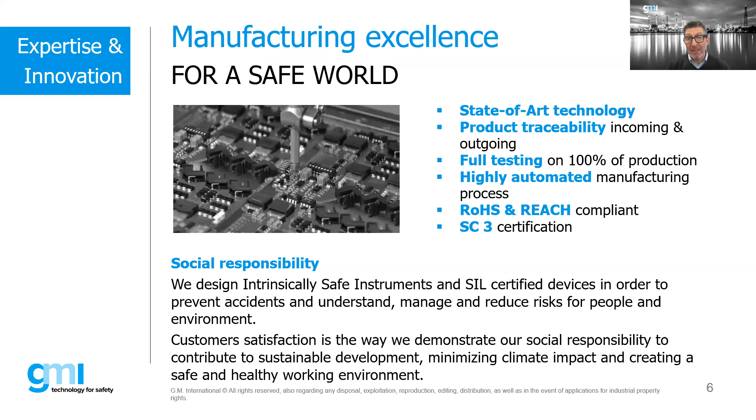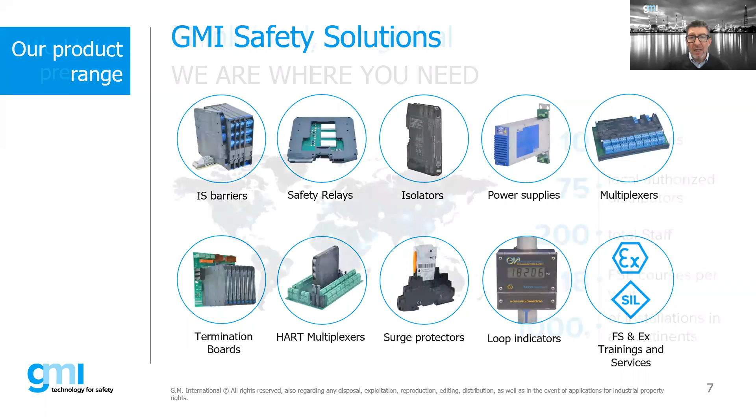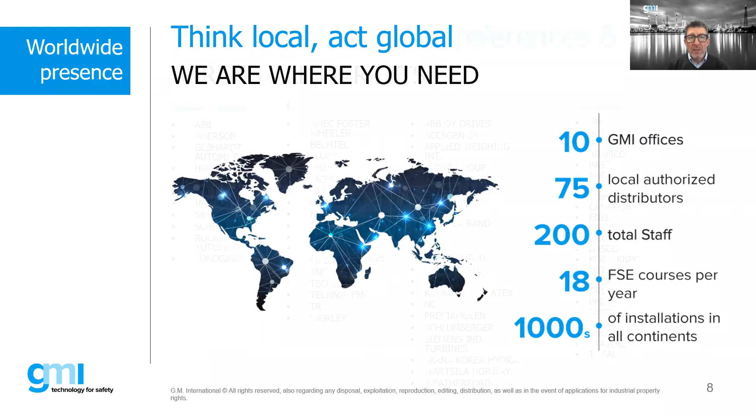And when we really start looking down deep and start seeing some of these issues, we actually can find that in many cases, it starts at the very early stage. Now, this particular report, which was interesting, came out quite a few years ago. It didn't deal specifically with EX mistakes, but it talked about some of the biggest areas of concern and root causes for industrial accidents.

And if we see in this slice of the pie - and again, I'm an engineer, so I think if it can't be the engineers, it's got to be those idiots out in the field doing problems. But if we actually notice here, a lot of the problems actually result at the very early stages in specifications.

So what this presentation will do is actually talk about the various mistakes at the various stages, because what I typically find in many cases is that when I go in and do a final inspection, maybe equipment is installed properly, it's absolutely done perfectly. However, it wasn't the right equipment in the first place due to various issues.

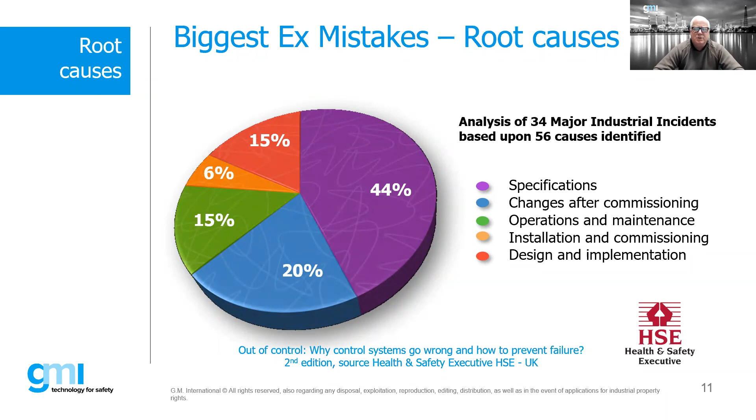So there's never really a time that people set out to say, hey, I'm going to create some mistakes today that will result in a disastrous situation 3 years from now or something like that. We don't deliberately try to make these mistakes, but it is something we have to take note of as engineers and designers - that in many cases, these mistakes that ultimately result in major issues can come at those very, very early stages. So that's really the intent of trying to cover some of this information today.

There's EN versions of it, there's different country versions of it, but the base standard is that IEC 60079-17. The installation standards are all over the place, but the main IEC one is the 60079-14. So the intent is that when we're designing systems, we use the -14 standard as well as country-specific wiring regulations, as well as client-specific wiring regulations. And then we follow up with that with our inspections based upon the -17 standards.

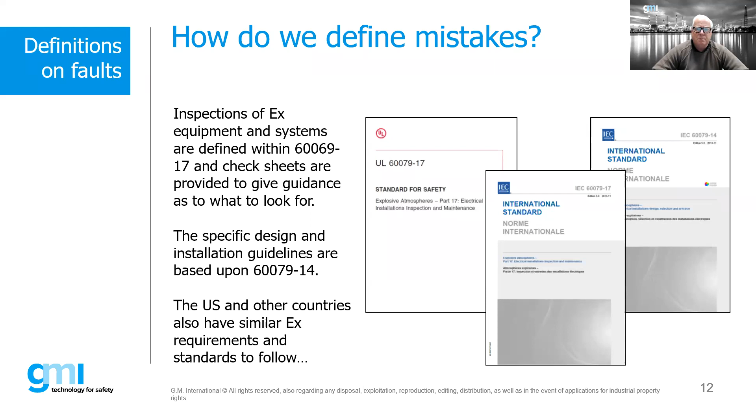So if you have not seen the -17 standard, at the very back of it they have inspection schedules. And this is what, as an inspector, I use when I'm doing a detailed inspection. And we have different grades of inspection - detailed, close, and visual. And there are inspection checks that we use to go through the equipment that's installed.

I always tell designers, hey, look at these inspection sheets before you call an inspector in, or actually, ideally, make sure that you're following these as your check sheets for even writing your specifications, because these check sheets are basically the information that people such as myself, when we come in, are going to be using to make sure that we catch those mistakes, those errors that are made. So it's important that we use this, we're aware of this.

And again, it's a handy tool. It's available. Use it even as a designer, because this is going to help make sure that once that product is ready to leave, that it's safe. And not only that, but the users where we're installing and maintaining this equipment, we want to use this as well.

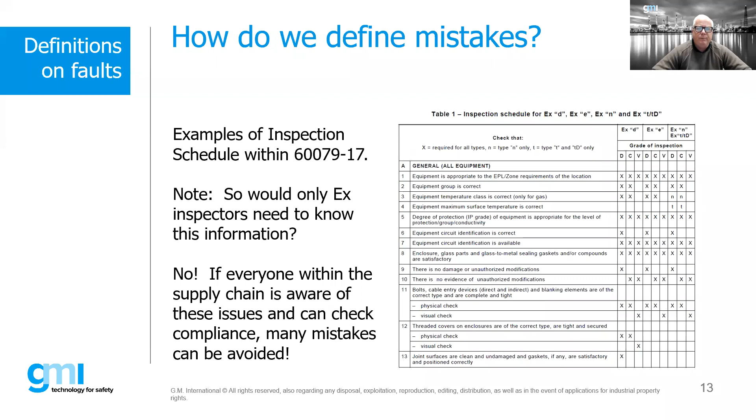So one of the biggest mistakes that I see really comes from one side of the business - as Paulo mentioned, we do training, we do inspections, we also are a supplier. We're a supplier for GMI products, but we also supply other EX equipment as well. And as a supplier, we get calls and inquiries from various people all the time asking for EX equipment, which is great - that's a big portion of our business.

And one of the biggest mistakes that I always see is that I'll get an inquiry and somebody will say, I need a motor starter and it has to have this, and it needs to be suitable for zone 1, and that's about the extent of it. Now, that doesn't mean that inquiry was not good, but that's really not telling me all the information I need in order to generate a quotation, right? Zone 1, okay - is it ATEX? Is it IECEx?

What is the standard? What do I need to comply with? Things like gas groups - is it 2A, 2B, 2C? What's my T code? Obviously EPL or zone of suitability is the big one, and that's usually the one everybody gets. But other than that, sometimes we don't get all that information.

Another one that gets overlooked is the ambient temperature. If a product isn't marked, it defaults to -20 to +40. However, we notice in many parts of the world, +40 is not going to be sufficient. We have higher ambient, especially in the Middle East or on the Gulf Coast, where we see ambient of +50 or +60. And certainly in cold temperature areas, we can get below -20.

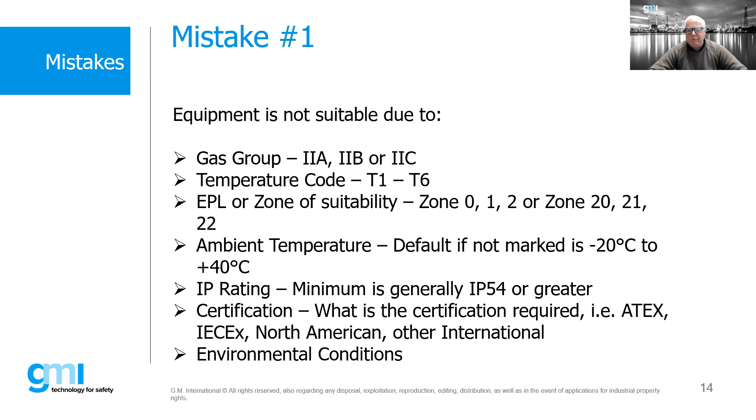So I figured just to give you an example of some things, I put together some labels to give you thought, if you will, to take a look at the label and see what you see on there. Is this product that you see here suitable for my requirement?

My requirement is zone 1, 2C gas groups, must have a T6 or better - T6 is the best. I have a high ambient of +50 degrees C. I need a minimum of IP65 and I need IECEx certification.

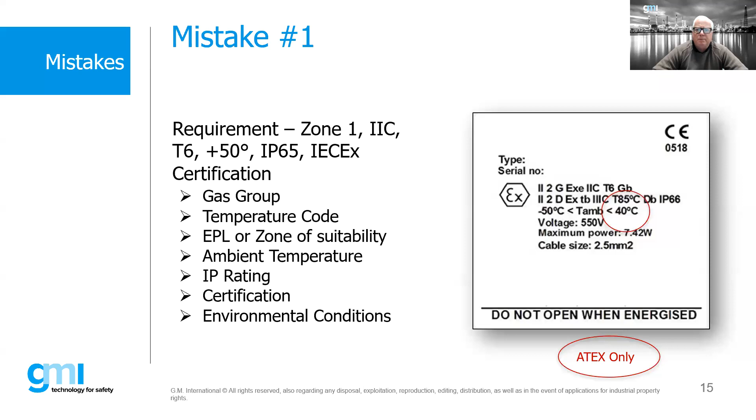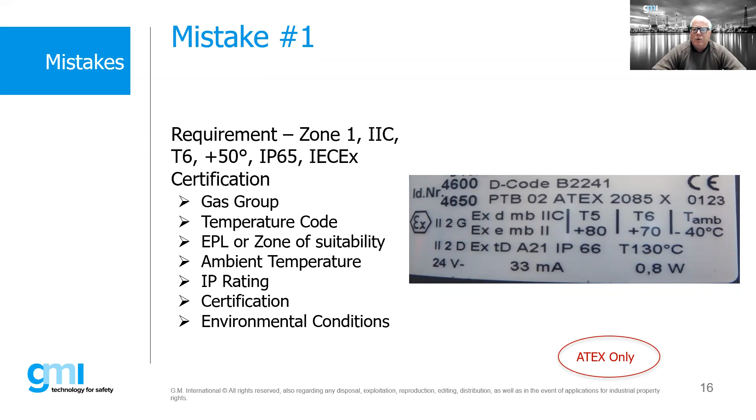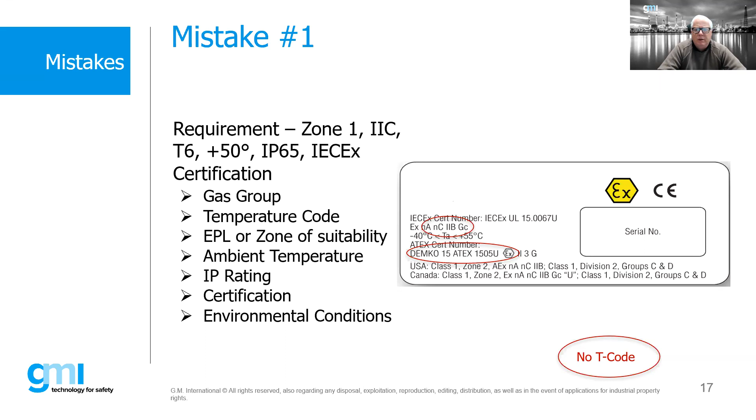Now here's a label for a different piece of equipment. Now we notice on this one, it does say IECEx, and there is a certificate number on there. However, if we look closely at our protection concept, Ex nA and nC are only protection concepts suitable for zone 2 applications. And notice it's 2B and not 2C. We do meet the high ambient requirement, but there's also another thing - there is no T code associated with this because this is a component. And the reason we know it's a component is we see a little U at the end of the certificate, which we'll talk about further in this presentation. So again, another example of a product that we just could not use.

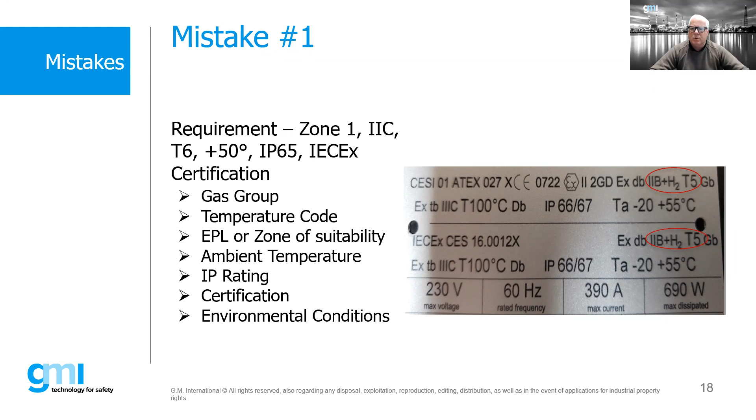Now here's another example. This product, if we look at the label closely, we see ATEX, we see IECEx, but probably some of you have keyed in on this already. We see a couple issues. Number one, we see a 2B plus H2 and a T5. Again, we don't meet the requirements of 2C and we don't meet the requirements of T6. So again, just other examples of labels that we can tell. And this is all part of our inspection process - we go through this, we look at the standard or we look at the certificates, we check the labels, and when we start seeing these issues, this is where we start highlighting them.

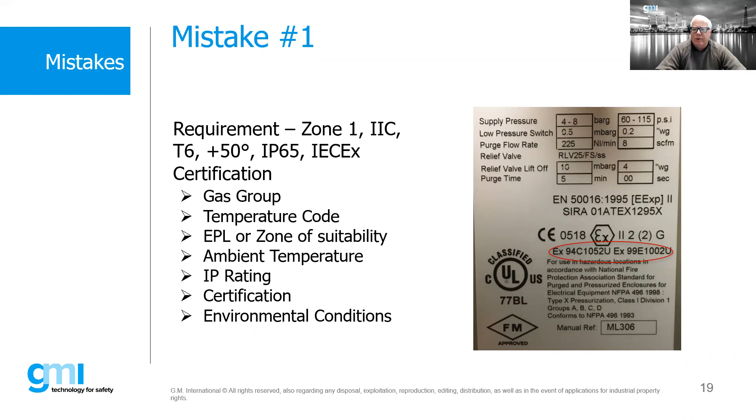Here's another example. Notice that this is an old EN label - the 50016 is from an older standard. However, it does have an ATEX certificate. But there's a couple issues here. Number one, we would want to know, can we install this in a particular hazardous area? We see that we have some brackets associated with this, so it's providing protection downstream. Can we actually install this into that particular environment? We would have to do some further digging on this one, but basically, based upon this information here, as it is, we could not install this without further assessment because it doesn't meet the requirements.

Here's another example, and I promise you we won't go through too many of these, but I just want to give you an example of some of the things that we do see and make it very clear.

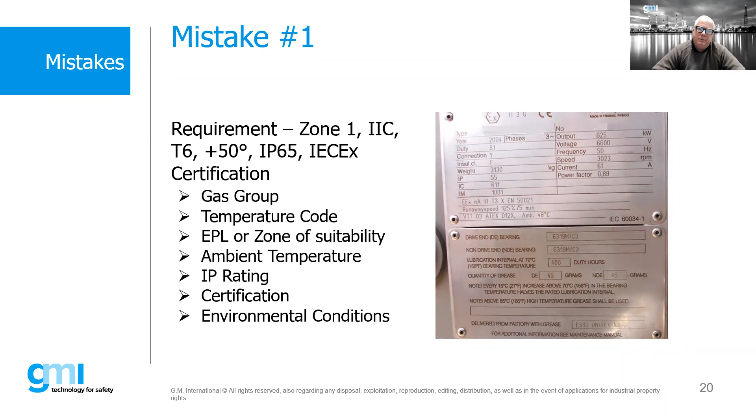Notice in this particular instance, this is certified to an older standard, which doesn't necessarily discount this from being in use. We wouldn't want to install this under the latest standards unless we have new markings on it, because those are old markings. But notice again, NA is a zone 2 protection concept. It does have gas group Roman numeral 2, which is telling us in effect it's good for all gas groups. And notice again, it's ATEX only, and our ambient is only up to plus 48 degrees C as opposed to plus 50. So a couple issues.

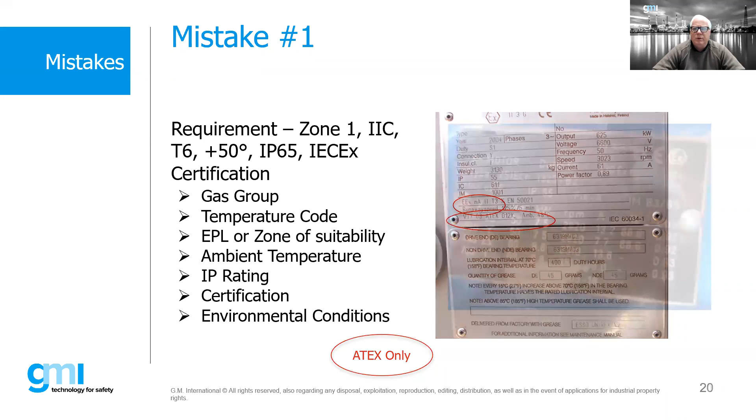Here's another example. Again, it's ATEX only, and I don't actually see a certificate number on this particular piece of equipment, but it is a zone 2 product only. Again, good for gas groups. We don't meet the requirements of IP65, it's only IP55. So again, it takes a little bit of time, we go through this, we identify this.

Now, does this mean that these products are not suitable for hazardous locations? No, it just means that they are improperly applied for this particular application that I've called out.

So the big important takeaway from this is that when we're specifying things, this is where I see the big issue. This mistake is usually a mistake where the engineer, the specifier, writes down the specifications. Then it goes through that supply chain process. It winds up in the hands of possibly a purchasing agent, sends it out to bid. If it's an or-equal type situation...

Well, first off, the design must be such that the engineer is making sure they take into account all of these characteristics, making sure that the original product, if it's a product specification, ensures that it meets that. But then a purchasing person gets their hands on it, says we can buy a similar product for maybe 10, 15, 20% less. It's always important that the engineers, designers, the responsible person is reviewing that information to make sure there aren't those holes. So it's important that everybody within this supply chain, the purchasing people, the engineers, designers, the suppliers, we have to know this information as well.

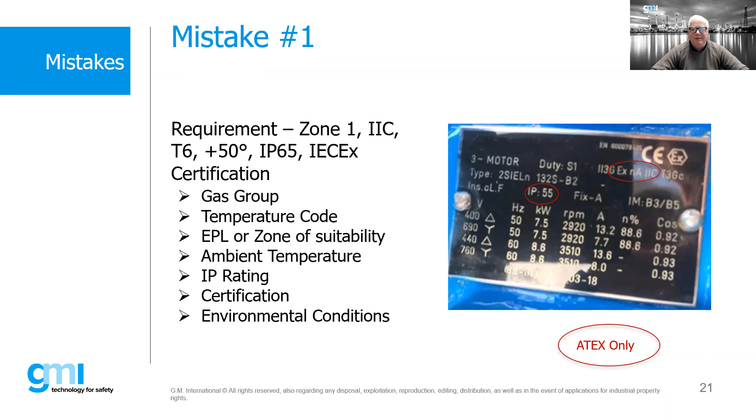So, okay, we have a question here for you guys, making sure you're still with us. Let me launch a question. What is the IEC standard that provides guidance for inspection of EX equipment and installation? There are 4 standards there, the 079-1, 14, 10, or 17.

So please, there is no judging here, just answer, click. We don't see who's clicking what. I had to check my answer myself, so I brought it down here to make sure it's the right one, because I would not know the answer to this one. But Bob gave me a hint. So I think those, Bob, you have A, B, C, and A, so we do have 2 A's here. Yeah, we got 2 A's, 2 A's make it right. But anyhow, you guys know that you either click on 1 or click on 17, and the difference is quite different, but it's a typo there, it's A, B, C, D. Anyhow, okay, give it a couple more minutes. Biggest mistake right here, actually, because we need to move. Yeah, it's your mistake. So before we get this, let me see.

There's a question here: how does the IP rating in this application affect the certification? Well, IP rating, it's always an issue, right? So yes, EX equipment generally has minimum IP ratings required. Most EX equipment requires a minimum of IP54 or greater. However, IS barriers only require IP20. Flame-proof equipment actually does not require an IP rating. But IP ratings are important, they're part of the testing, if you will, for EX equipment. So it is important to have.

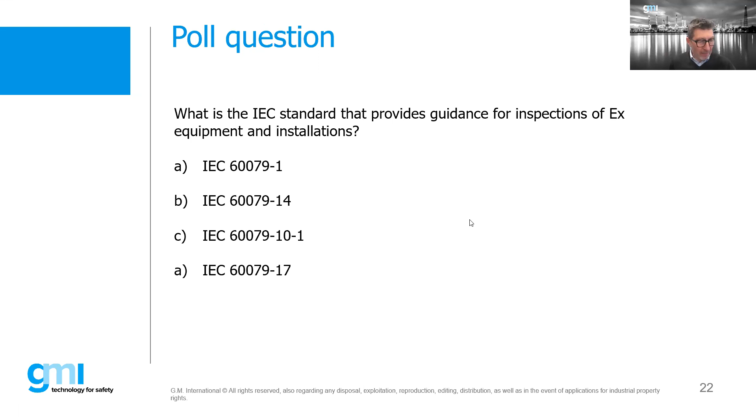Mistake number two: modifications to EX equipment outside of what is allowed. That's a big one. This usually takes place once it reaches a particular point, either as a skid fabricator or out in the field.

Additional entries into EXD enclosures is one of the biggest issues we see. People take EXD boxes and start doing things to them outside the scope of what is actually allowed. So first off, do not drill into an EXD box. You are allowed to do this as the manufacturer or as a manufacturer's authorized repair or modification center.

But once it leaves those locations, don't start drilling and tapping into EXD boxes. The other thing that people sometimes get confused about is adding additional components inside the enclosures outside of what is allowed by the certification. It's really important to understand that adding items inside a flame-proof enclosure changes a couple things. It could affect the temperature code by adding another heat-producing or resistive device inside the flame-proof box.

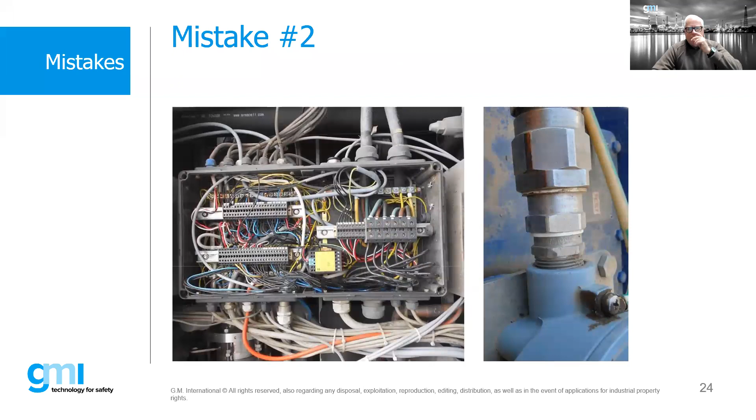So continuing on here - this highlights a little bit with regards to cable glands. In this particular instance, we've taken 2 adapters, if you will, used a cable gland, and put IP washers on. The important thing to note, and this is actually a mistake, is that during installation we can only use 1 accessory with a cable gland, meaning 1 thread adapter. Don't use multiple thread adapters with installations.

The picture on the left shows the tidiness isn't the best, but here's the important thing: we want to make sure we have a drawing of that particular product before we do an inspection, to confirm everything on the drawing is accounted for and nothing additional has been added to that enclosure once installed in the field. If it has, we want to make sure that's noted in our inspection records. We take that information back and make an evaluation of whether adding an additional terminal changed the product - what has that done to its EX certification? Be very, very careful when modifying existing EX equipment.

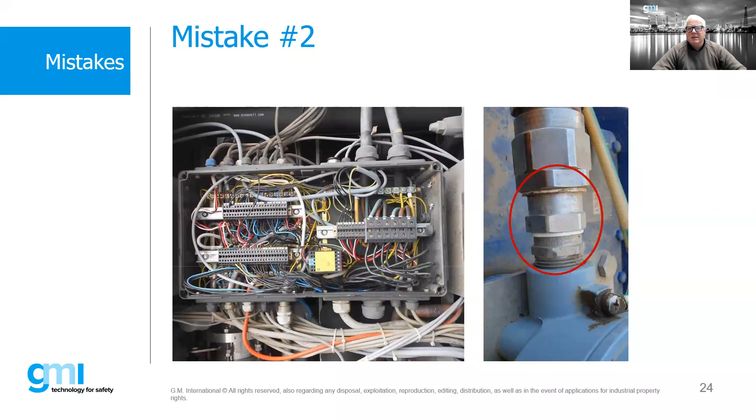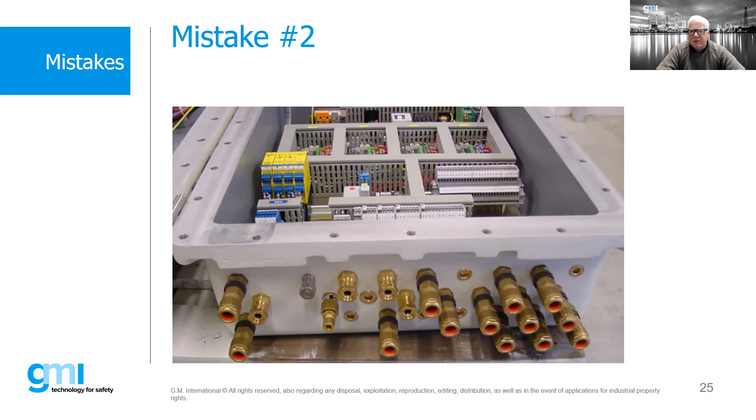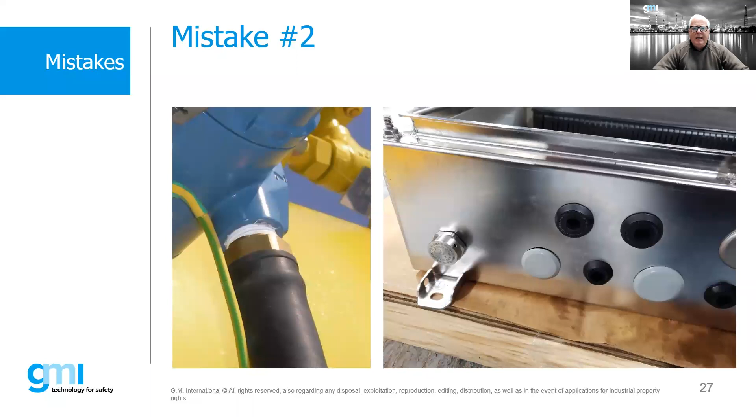This just shows you a little bit more as far as the use of Teflon tape. Here we have on the right-hand side some examples of stopping plugs that were non-certified. Now, these could have been traveling plugs, where somebody installed them with the assumption that cable glands are going to be put into those enclosures. That's fine - however, those would have to be removed before that final detailed inspection and replaced either with a certified plug or a cable gland.

The reason why we don't want to use Teflon tape, as you see on the left-hand side - Teflon tape is fantastic for use on plumbing and gas lines and all that good stuff. The problem with Teflon tape is that the threads between the enclosure and the gland actually act as a flame path. So by putting Teflon tape there, you've basically clogged up that flame path, which could increase the pressure that could be escaping in other flame paths. So we don't want to use Teflon tape - end of story.

What if we put grease on the flanges? Yeah, you want a non-hardening grease. The -14 standard basically says something to the extent of a non-hardening grease. We don't want to use things like silicone, but thread lubricants are perfectly acceptable. Usually the manufacturer will tell you what they would recommend. It is recommended to put some sort of thread lubricant on flanged and threaded designs to keep them from seizing, because that is a major issue.

Yeah, all right, we have still more questions, but let's move forward, otherwise we never reach the end—let's see how we get along. No worries, and by the way, if we go a little bit long that's okay. If anybody wants to stay around, we'll try to accommodate. If you want to stay with us, we are here for you guys.

Yes, so mistake number 3. This gets into cable glands and accessories and the things that we look for: non-certified glands, improper installation. Are we using the appropriate accessories? Maybe using Ex e into Ex d. One of the things that usually everybody understands for the most part, but another issue, is failing to take note of the special conditions for safe use on the installation of cable glands.

Every cable gland that you buy will have an X at the end of it in their certificate, and that means it's a condition for safe use. Generally speaking, it means that it's not meant for portable equipment, meaning it's meant for a fixed installation. However, some cable glands in their X also have additional information, such as: if you're using it with that particular cable, it must be clamped within a certain distance of the end of the gland. So making sure we look at the X condition on the installation of cable glands is important to understand. Because again, as an inspector, I'm going to look at the cert, look at the special conditions for safe use, and see whether or not you're actually in compliance with those conditions.

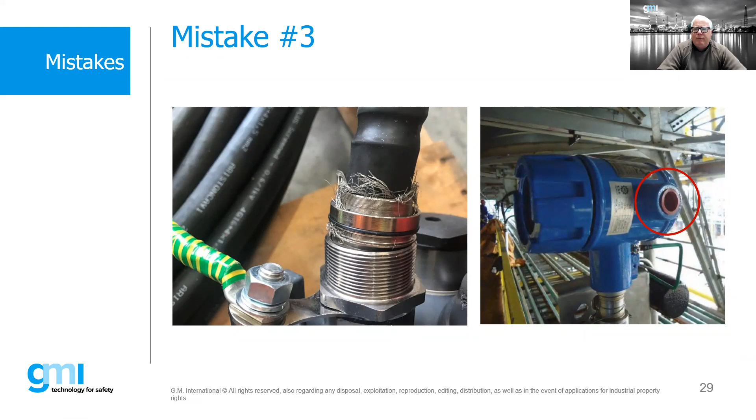This shows a little bit of some of the things you'll see on the left or right-hand side. There's an example of a stopping plug that's actually a traveling plug installed into a transmitter during installation—that should have been replaced with a certified plug. The picture on the left-hand side is a bit different, but what you're seeing there is the armor is not proper, and we also see some deformity in the compression around the gland itself. That's the back end seal, caused by cold flow, which we want to be very, very careful about when installing and maintaining cable glands.

To answer the specific question, can we use a 90-degree fitting with a cable gland if the reducer fitting went into the enclosure and the gland went straight into the 90? Generally, I'd say yes. There's a bit of a gray area in the standards, because it doesn't specifically state the use of a 90, since we're basically saying the gland should go straight into the enclosure. But this type of installation is not uncommon, except we have a little too much there.

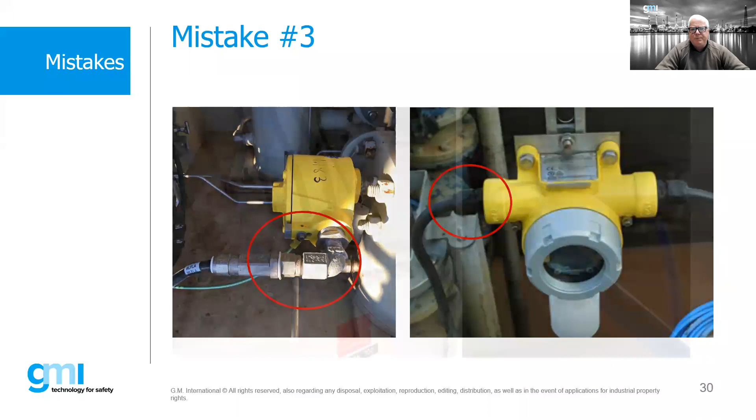These are pretty obvious, but what you see on the left are stopper fittings or seal fittings that we would typically use here in the United States. The person that did this obviously didn't have any understanding of what they were doing, because those all have to be sealed up with a compound-type material. They've probably spent thousands and thousands of dollars on that box, but they've defeated the entire purpose of that enclosure by installing those seal fittings improperly.

And obviously on the right-hand side, you see a cable gland being pulled out and not being properly secured.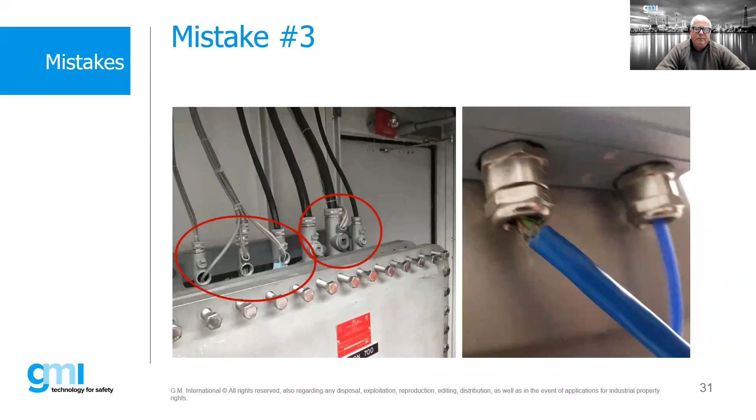These pictures are a little difficult to see, especially the one on the right, but on the left we see what's actually a combination of putty and what looks like a liquid pour-type compound, and they've done it from the inside of the enclosure. So I can promise you those glands will never be removed -- that will be a permanent installation.

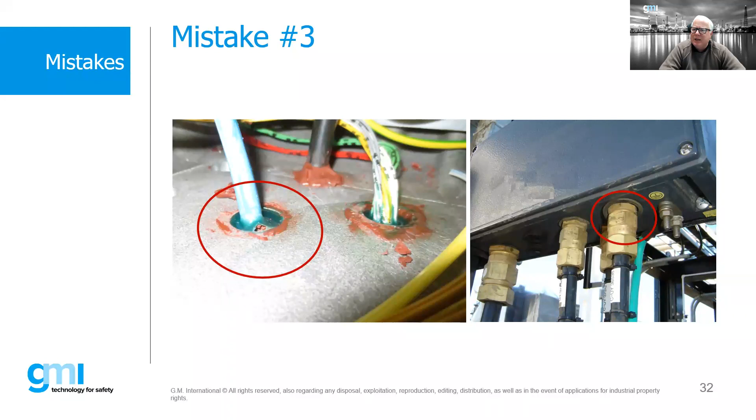That's not good. On the right-hand side, if you look closely, they have an IP washer, but it looks as if the washer is too large and not providing a good IP seal around the gland. Is the IP washer the only means to provide IP protection? That's correct -- it provides the IP protection between the gland and the face of the enclosure. So just glancing at it, you might think it's maintaining the high ingress protection rating, but looking closer, we notice that IP washer looks a little too big. And it is. So it's important.

Can we do something different than an IP washer to provide IP protection, or is that the only means? Some glands have O-rings built into them, and that's certainly acceptable. Generally speaking, otherwise, to maintain the IP rating of the enclosure you're supposed to use an IP washer. There's actually a bit of dispute with regard to the standard -- one of the changes in the '14 standard came for the use of a not-certified washer, but the cable glands now actually have to be certified in conjunction with a particular washer, as opposed to just putting any IP washer on it. The washer itself doesn't have to be certified, but it should be tested and certified in conjunction with the cable gland.

Now, what you see on the left-hand side, we have damage to the cable -- it's being pulled out. In this instance, on the right-hand side, when we start opening up the glands, we notice the armor is not secured to the armor cone. Those are examples where, when installed properly, everything is fine. If you notice in the background behind these glands, those are some cable shrouds.

As an inspector, I don't like these, and most clients are getting away from cable shrouds because what they end up doing is holding a lot of moisture against the cable gland and actually covering up a lot of the faults.

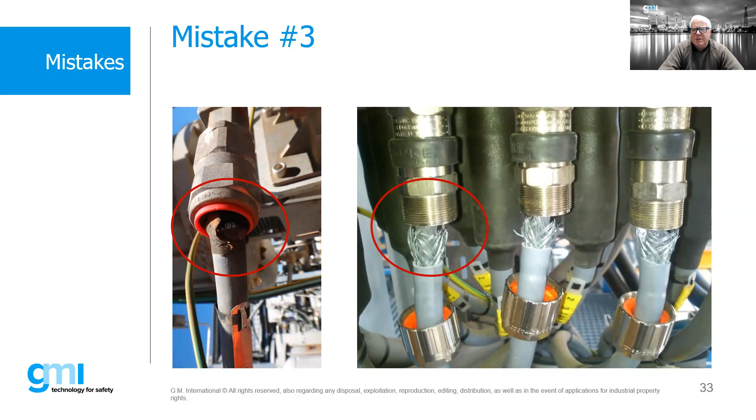This is again the same type of issue. Here the armor is not properly secured on the inside, and we had a cable shroud covering this up. So you have to be very diligent when doing inspections.

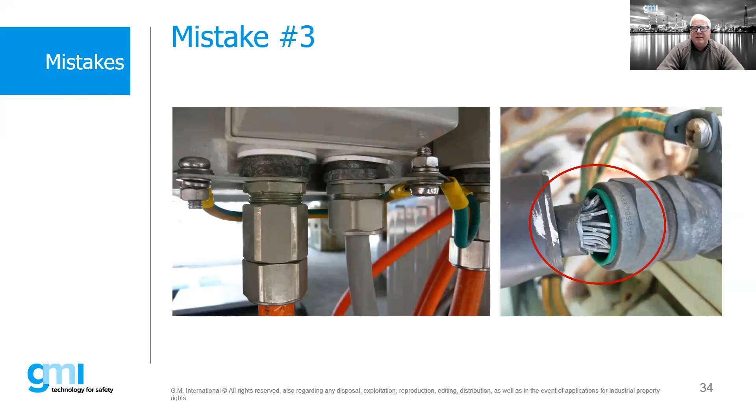On the left-hand side, this may or may not be a fault, but you have an adapter and a gland, which isn't a problem. We have an IP washer against the box, which is fine, that's what we want to see. We have an earth tag, that's fine too. The one on the right-hand side with that IP washer is a little distorted. Is that an automatic fail? I'd say no, but we'd want to reinstall it, and if we can't get that washer to sit flush against the enclosure, then let's replace it.

Bob, there was a question since I noticed this ground plug earlier. If there is a ground plug on the box, it must be connected to ground, right? Is it a recommendation, or is it required?

Yes, there is a requirement within the -14 standards that all EX equipment should be grounded to the grounding point. You'll see, like in the picture on the right-hand side, a ground point on that box, and another box where there's also a ground point. That should be grounded to the structure in some way, shape, or form. So yes, we should be grounding them.

The picture on the left-hand side is a little difficult to see, but in this case we've left the plastic sheathing over the internal bedding, and that's actually a flame-proof gland. So we've compromised the ability of that gland to provide any EXD protection by the use of this plastic sheathing. That has to be removed.

On the right-hand side, obviously they've taken some compound and put it around the back end of the glands for some particular reason. I don't know why.

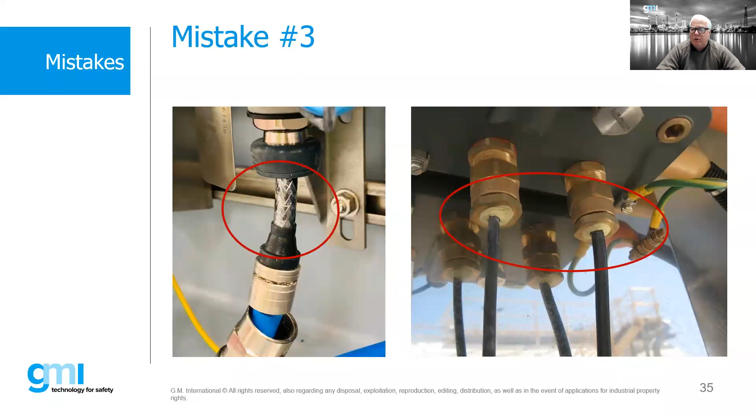When we use barrier glands, on the left-hand side we see that the compound doesn't go completely around all the individual core conductors. That is a mistake. On the right-hand side, there's again a diaphragm seal that's been torn, so that's providing EXD protection that's now been compromised, which would be an issue.

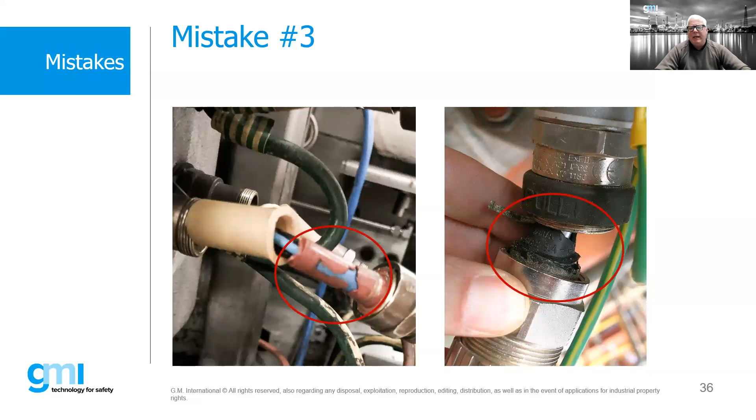As you can see from some of these slides, a lot of the mistakes we see are really around glanding in many cases. It's not completely around glanding, but that is a huge issue. So a lot of times when you start seeing issues with glanding, that leads you to believe there may be some other issues as well.

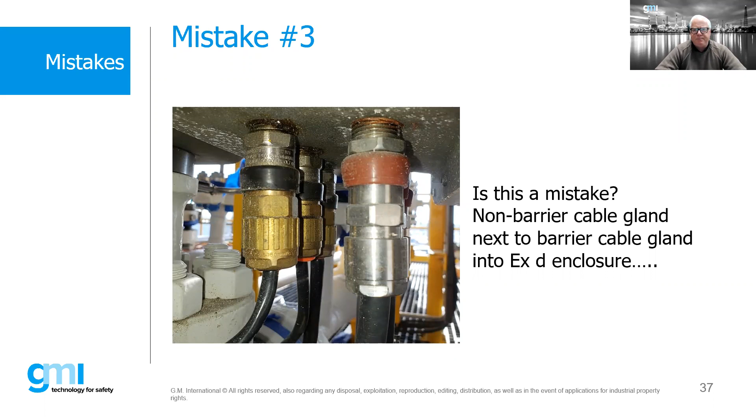Have you ever get afraid when you're inspecting and you see these boxes, and get the feeling you have to run away before something goes boom? Yes, my colleague Wayne has worked offshore many years and was an installer for about 15 years. Then he went through a complex training program to learn all the things he was doing wrong, and he said, oh my God, I can't believe I survived. I don't do as many inspections as Wayne does, but he's shared some stories that are very hair raising. It happens a lot more than we think, unfortunately it's a big issue. We had our own experience too. We went to a plant with my engineer and he said, Paolo, I'm not staying here any longer. I said nothing's gonna happen, but they had an explosion one year earlier and were actually having a commemoration that day. When we talked to those guys, nothing had changed, and we said, wow, are we still sitting here?

So, guys, you had this question - it was easy but not an easy question: Can you use an EX certified stopping plug in conjunction with an EX certified reducer fitting on an EX enclosure?

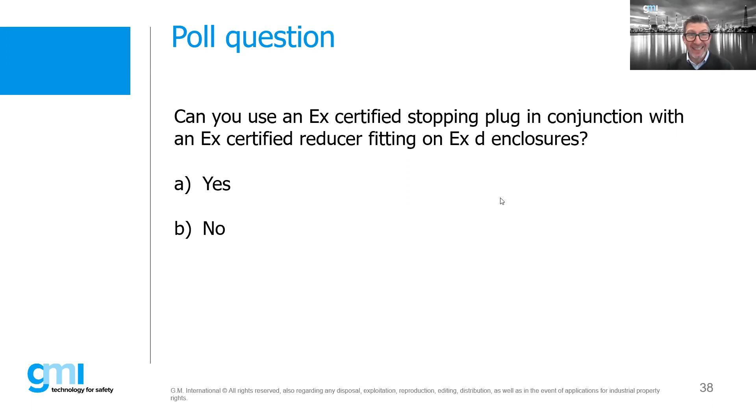Mistake number 4 - we've talked a little about this in other webinars - intrinsic safety has its own faults: no segregation between IS, no labels, improper grounding, no descriptive system documentation, failure to select certified equipment where required, i.e. a non-simple device, modifications to the design after installation such as increasing cable length, substitution of a different barrier type, and so on.

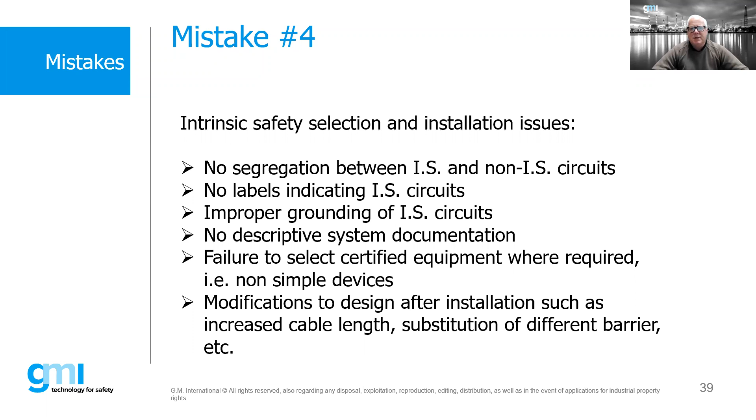These are all faults we see both from the design standpoint and the installation standpoint. On the left-hand side you see a jumbling between IS and non-IS - that's not allowed, we have to have a 50 mm segregation between IS and non-IS. Again, if we didn't open up that enclosure, we would never know this. We would be doing a detailed inspection, and this is where we find it.

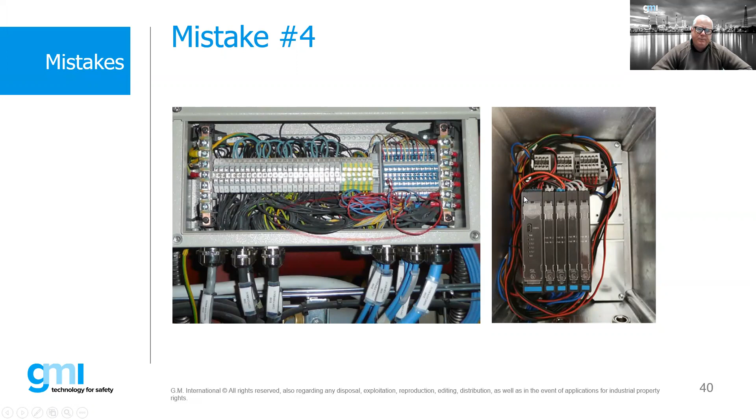On the right-hand side you see again the same type of situation, where we have our IS side and our non-IS side, but we have this looping around which is not allowed. Same type of situation here - on the right-hand side we have some power cable with IS circuits running right next to it. Neither is shielded, so we could potentially induce currents into that IS circuit above and beyond its parameters. Same thing on the left-hand side - we have power cables running right next to IS cables. We don't want to see that.

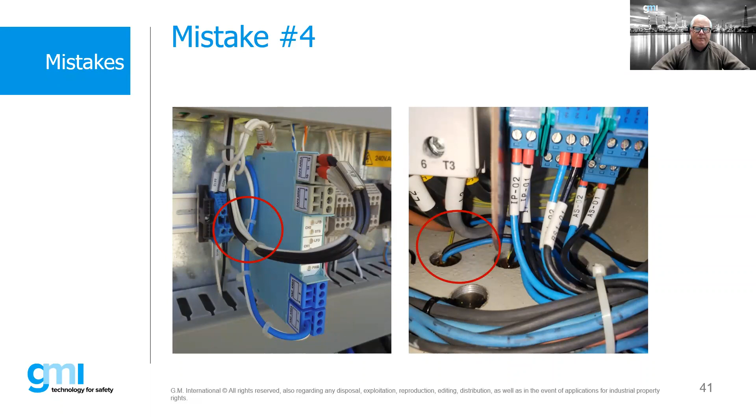Mistake number 5, a very common one: U components versus certified equipment. Notice on the right-hand side - I apologize, it's a little blurry - this is an enclosure full of terminals that was supplied by the manufacturer empty. The fabricator installed certified terminals, did a great installation, but unfortunately the label still shows this was a component. So in this scenario this would not be acceptable because it is a component.

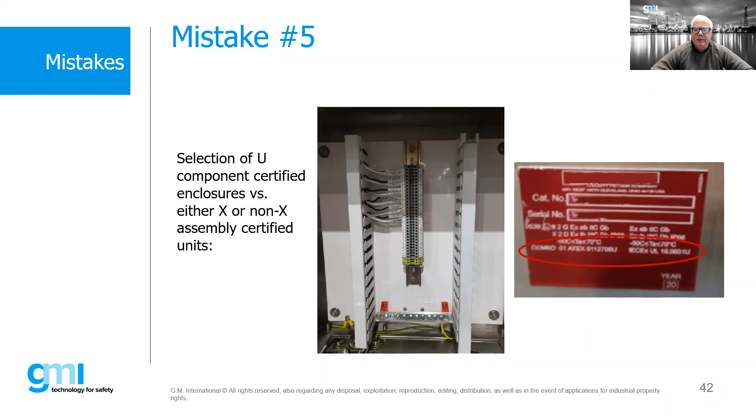This certified product label shows the same product, same part number, SX29.1N. But notice on the left-hand side, the certificate has a U at the end of it, while the certificate on the right-hand side does not. Besides seeing a U or non-U, on the right-hand side we have additional information such as a T code - we notice a T6 - and the number of terminals, the cross-sectional area, the maximum voltage. On the left-hand side we don't have any of that information.

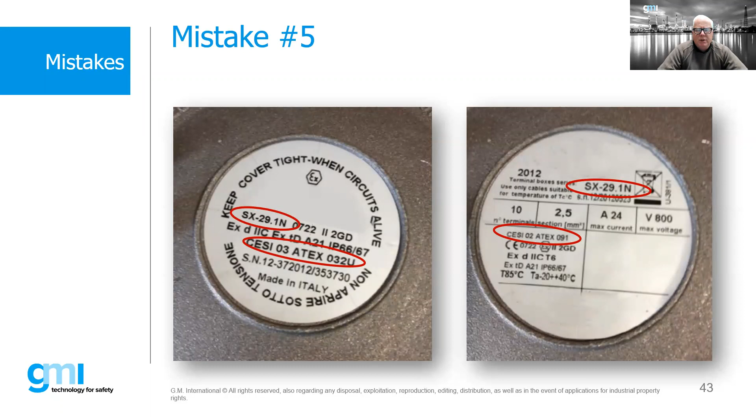So it's important, whether we're specifying, installing, or selecting products, to understand that a lot of manufacturers will sell the exact same product either as an assembly certified with components installed, or as an empty enclosure.

If I'm a manufacturer planning on using this particular enclosure and I'm going to populate it with a bunch of stuff and take that to my certification lab to get certified, no problem, I'll buy the box on the left. If I'm installing this as is, then I want to buy the product on the right-hand side. This jumps up and bites people all the time - use certified versus component certified products. Just be aware of that. If you get a U-certified product, that should be a red flag, unless it's a component on the inside of something else that is fully certified.

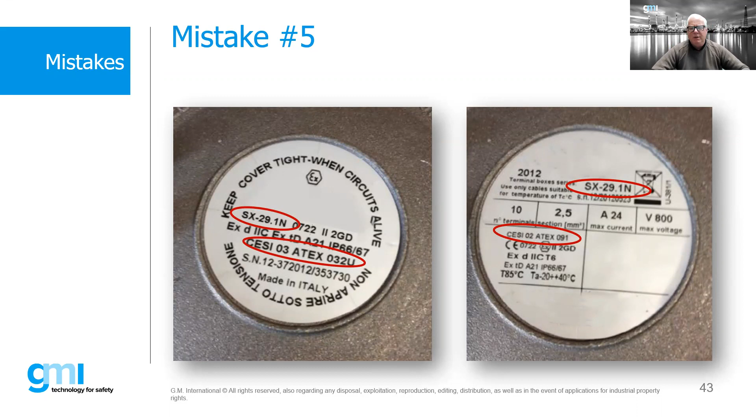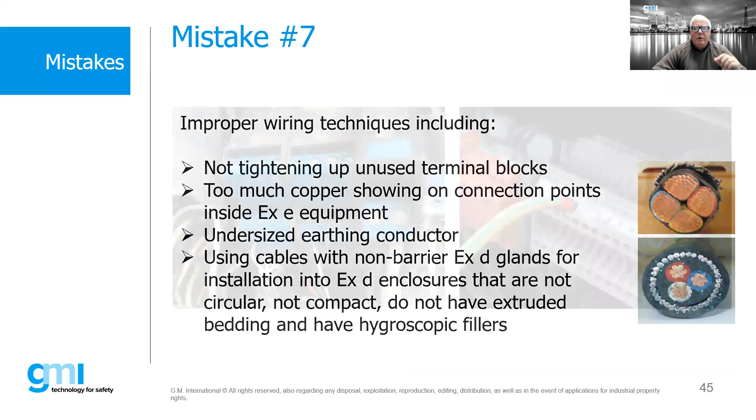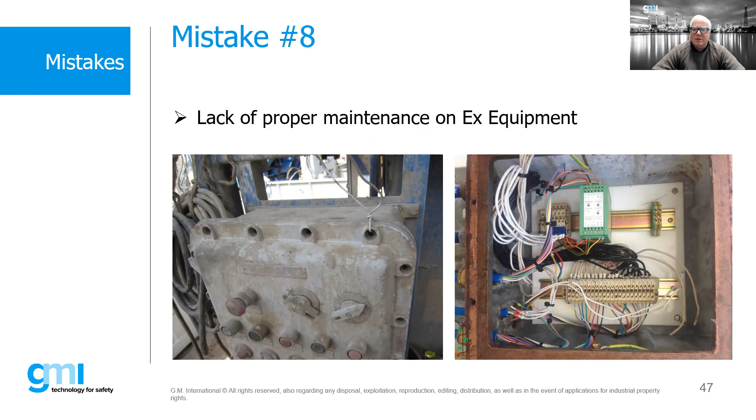Now, I will skip this one since we're running out of time - improper wiring techniques, those types of issues. Maintenance on EX equipment, not using bolts, making sure the flanges are properly taken care of, those types of things. On the left-hand side, accumulation of water and moisture on the inside. And on the right-hand side, when we start adding dust and don't maintain or clean it, what do you think that does to its temperature code? It will make it go up. So we want to keep these installed pieces of equipment relatively clean and dust-free.

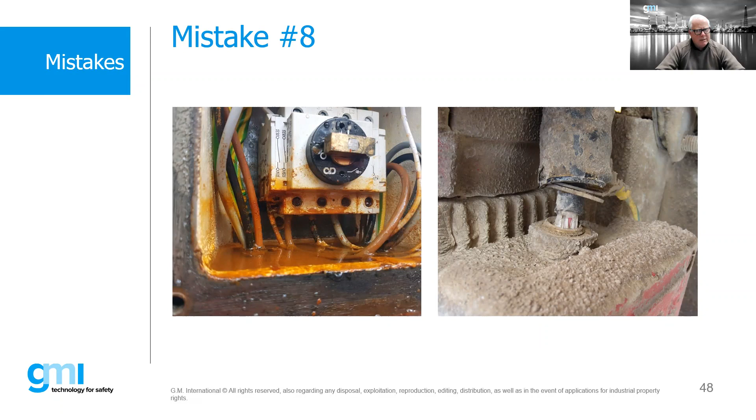Again, earthing of IS barriers - this is a huge issue. We want to make sure that if we have Zener barriers within our facilities, they must be earthed to a clean earth as opposed to a dirty earth, and that resistance has to be less than 1 ohm. So it's important to understand, when using Zener barriers, the difference between clean earth and dirty earth.

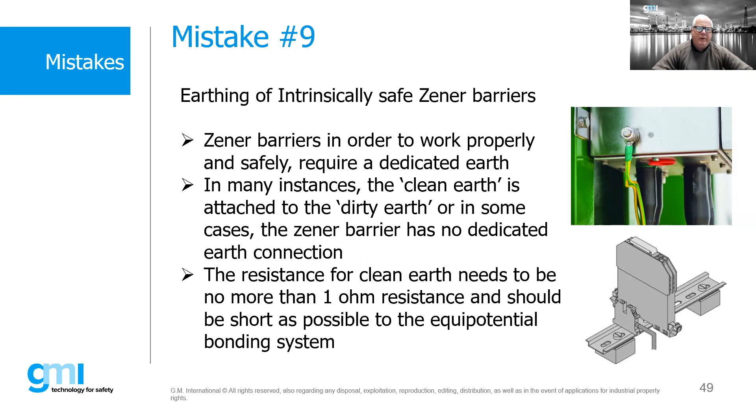Okay, our last poll for today - one letter at the end of the certificate number, ATEX or IECEx, a component certification. You talk about this all the time - it's a component, not a fully certified product. It has to be used within a certified product. We used to have one of those, actually - it was a small power supply we designed, rated correctly, and the customer had to use it within their product and install it, then certify the complete product, like antennas. We were selling it to an antenna manufacturer.

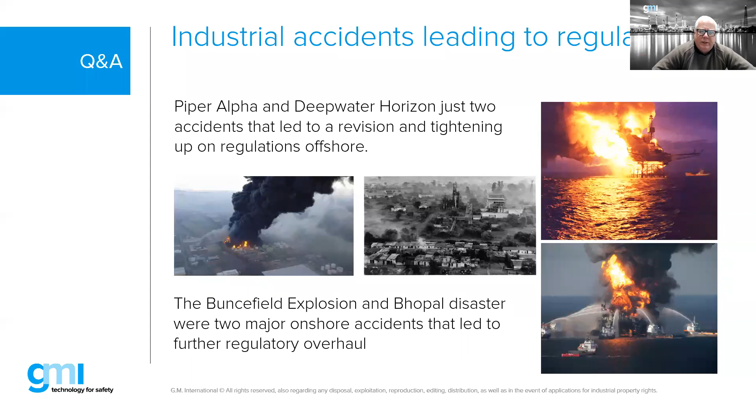We had a question on the EN 50495 standard, which covers safety devices required for the safe function of equipment with respect to explosive risk. What about this standard, Bob? It's the first time I heard about this standard myself. Yeah, it's one that people forget about.

Basically, in a nutshell, it's looking at whether we have a piece of equipment protecting that motor. A good example is a motor starter. Motors, depending on the protection type, have what's called a TE time, meaning that to maintain safety in a hazardous location, if you get into a locked rotor situation, that motor must be shut down within a specific time frame, usually 10 to 15 to 20 seconds. So there's a safety device designed to shut that motor off.

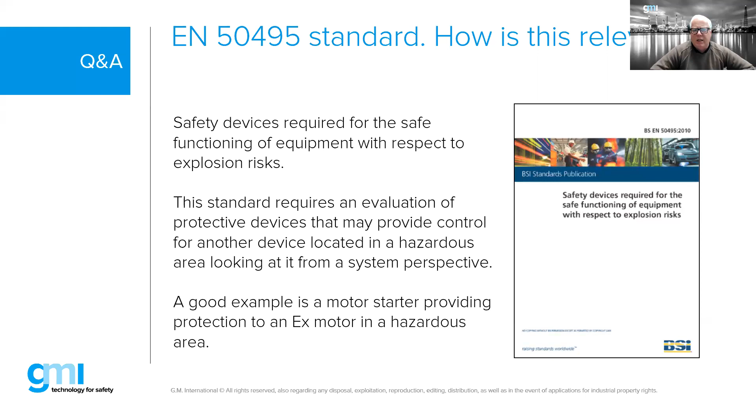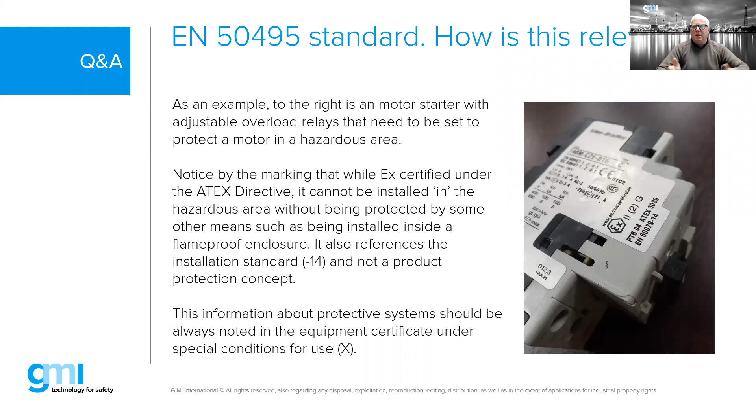If you go to the next slide, we show an example - a picture of a little contactor manufactured by Allen Bradley. Notice it has an ATEX cert. It's not meant to be installed into a hazardous area, but it's meant to provide protection to an EX motor. So it's a device that falls under the scope of this standard, matched to that motor. Somebody needs to take that motor nameplate information and this safety device and make sure they work appropriately.

Next question: breathing apparatus criteria - what protection concept is allowed in the design of such systems? Interesting question we got, huh, Bob?

Yeah, actually we're working with a customer right now on respirator systems. Generally speaking, you're talking about low energy powered type protection concepts - things like intrinsic safety or non-sparking are generally used. There could be things like encapsulation, EXM, or even potential flame-proof components, but generally speaking it's going to be limited to EXI or EXNA/EC for things like respirators.

Next question: how to use an IS barrier on TCP/IP or a serial line? That I might answer myself, being the manufacturer of such device. The question was, do I need a barrier on both ends?

Next, how to properly ground wire screens. Well, Bob, that's for you.

They typically need to be grounded. I only remember only on one side, right? You cannot ground the screen on both ends. Yeah, so typically the cable screen goes to a clean earth, but they must be left floating on either the control room or hazardous area side. Typically on the hazardous area side they're left floating, and grounded on the control room side, so in the cabinet.

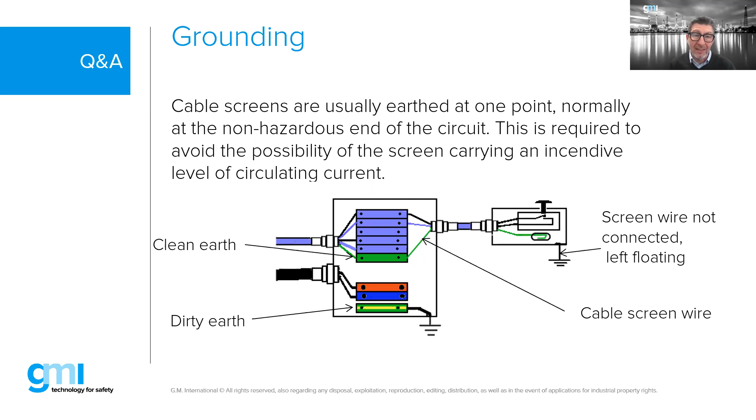What precautions should be taken during maintenance? That was also a question. Do we need to do maintenance? How do we maintain a thread, for example, or make sure the thread is correct? And how do we plan for that? That's an interesting question, right?

Yeah, it really is. Without going into too much detail, I'd recommend looking closer at the Dash 17 standard, because this gives you your maintenance inspection schedules, how to achieve it, what to do, how inspections are done. There's what's called initial, periodic, sample, and continuous supervision. There are different grades of inspection frequency, lockout-tagout procedures, and also competency of the personnel doing the inspections. This competency issue is referenced in the Dash 17 and Dash 14 standards, giving information on what inspectors should be trained in and how they should be determined to be competent.

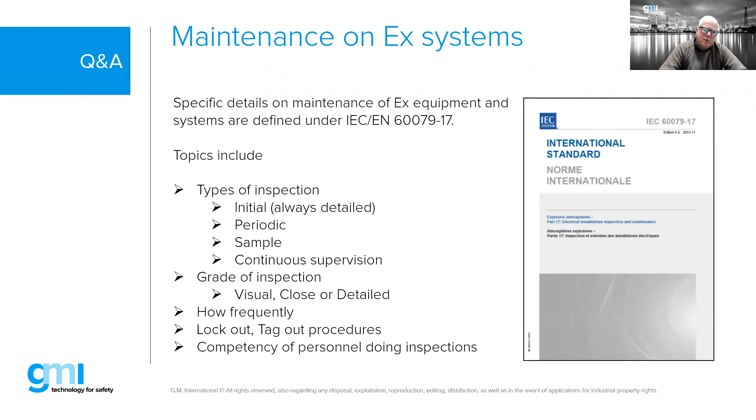We also have a question on EX enclosures having removable gland plates. Is that allowed? We talk a lot about these types of plates and issues. D boxes typically don't have a removable gland plate because they are a full sand cast, pressure cast type enclosure. They have to withstand internal explosions. So by putting a gland plate on there, you're not going to meet that requirement, right?

EXE enclosures definitely can come with removable gland plates. So if a gland is being replaced or a new gland is being installed, a full detailed inspection of the gland should take place. What's good practice is, generally speaking, have somebody within the organization that knows what they're doing install the gland, and then have a second person come in and do a full detailed inspection on that gland, and make sure that all the documentation is updated in the dossier to say we've done this type of maintenance and all that good stuff.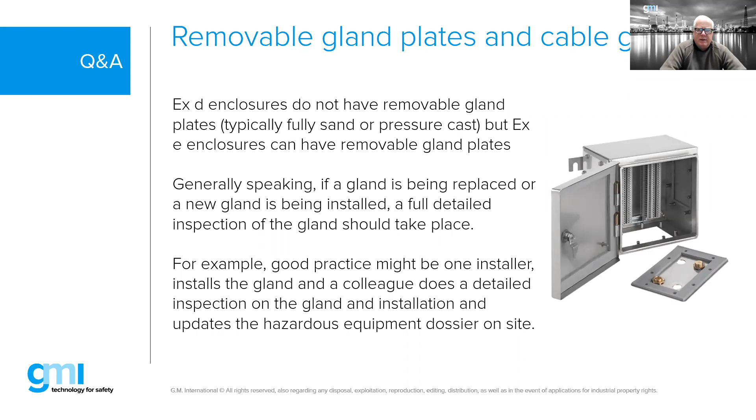And how about how often we have to do this maintenance? After initial installation and commissioning, is there a recommended periodicity to validate a system? What we say in the standards is basically no longer than 3 years, every piece of equipment should be inspected. For portable and moving equipment, really, I get confused - I think it's 6 months, might be a year. But portable equipment, I think, is 6 months. So if we have portable hand tools or something like a hand lamp that's EX or something like that.

Great. So let's see a few more questions here.

The pros and cons from a maintenance issue of a Zener versus galvanic isolated barrier - that's a question I can try to answer. Basically the big difference between an isolated and a Zener barrier is the grounding. You do need grounding for Zener barriers, whereas you do not need grounding with galvanic, and that brings a whole lot of differences in cost, maintenance, and other issues. Of course, Zener barriers can be less expensive to some extent, but in general today the prices come very close, and an isolated barrier provides a safer application in the sense that you cannot do anything to that installation to impair safety. Whereas, for example, with a Zener barrier, you can improperly ground it, or ground the loop in the field, have a ground loop, and then you have a problem.

What about IA, IB, IC? What advantages emerge from this protection concept, and what are the differences between them? Basically, these are all 3 different protection concepts that are recognized as intrinsically safe. IA is suitable for zone 0, 1, and 2, IB so forth, so on. The usual question that comes up is what's the difference between, say, a barrier that's rated IA and another barrier that's rated IB? An IA barrier will have basically 3 independent Zener diodes as part of the protection concept - they have redundancy, if you will. So things that are suitable for zone 0 have to be 2 fault tolerant. Products suitable for zone 1 have to be single fault tolerant, and things suitable for zone 2 do not have to be fault tolerant. So the difference is that the higher level of protection has a higher level of fault tolerance, or more backup fault tolerance in a way.

What about - can I install a barrier in the classified area? That is a simple question. Typically, IS barriers are certified for zone 2 or division 2. If you want to go to zone 1, you have to install them into another enclosure, an enclosure, for example EXD or EXP, following the conditions of the EXD enclosure - for example, as mentioned before, how many I can install, what is the maximum wattage, and so on and so forth.

Yeah, it is important to understand we just can't take an EXD box and just pop a barrier in there and say we're good. Make sure that box is certified to house associated apparatus on the inside. And again, can we just take anything and pop them inside a box anyway? No, they have to be certified as per the manufacturer. And generally speaking, we really can't do changes to the inside of that enclosure other than repairing things once the enclosure is in the field.

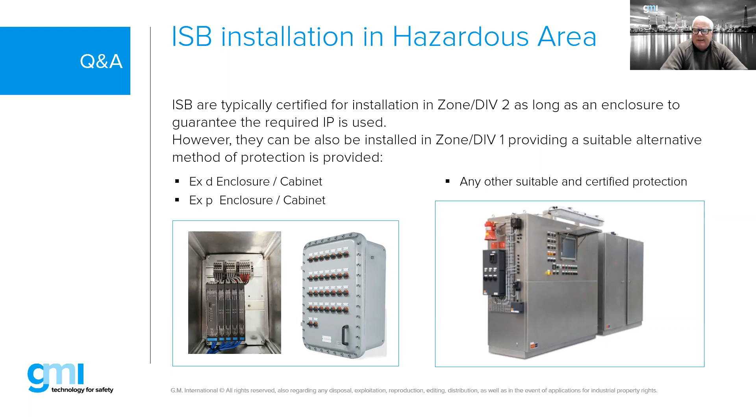So if I have, like in this case, multiple IS barriers or IS circuits into an enclosure, I do need an enclosure classified for that area. Correct, or it's a zone 2 area. Can I use a general purpose enclosure, or do I need an EXE enclosure? For zone 2, you would have to use a certified enclosure. You can use an EXN enclosure, but generally most manufacturers have EXE enclosures, and they're fairly low cost, plastic - they don't all have to be heavy stainless steel type things.

What about another question that came in during registration: is it possible to install a non-certified simple element like a push button or a switch using a barrier? That's an easy question. It's defined within the -11 standard. Basically a simple apparatus is a passive component, which could be a switch, junction box, resistor, or simple semiconductor. We just want to make sure these devices don't generate or store energy.

So a switch, because it doesn't store any energy, can certainly be used with an IS barrier. It's not uncommon to use a general purpose light switch in a very onerous hazardous area, and it's perfectly allowed, because it's the barrier that provides the safety for it. It's considered to be a simple device.

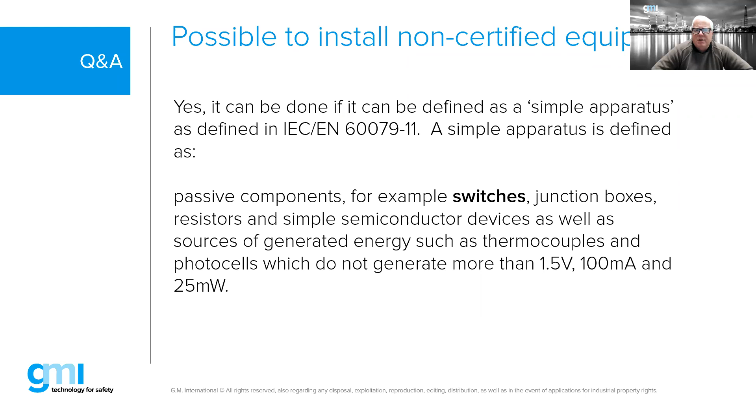So which hazardous area protection method is most used? That's a question with no single answer. I tried to put together some answer - it depends on the part of the world you're in. For example, in our experience, US related operations typically like the big boxes, the flame-proof solutions, whereas Europeans like IS more. But the real answer depends on the constraints of your application. If you have a motor, you cannot make it IS - there's a limit in IS.

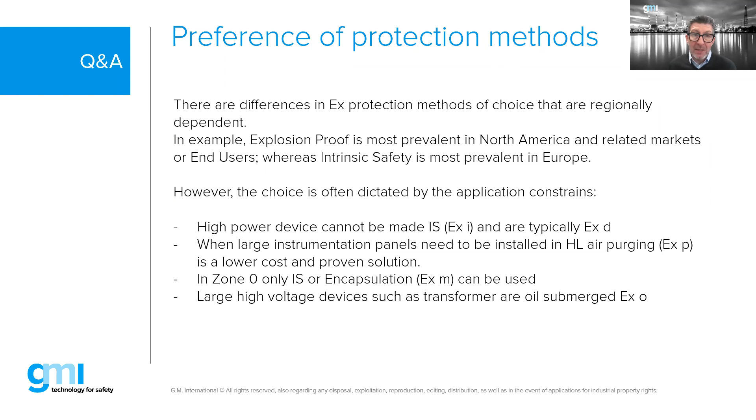So it really depends on your application. Let's move forward - in which application can intrinsic safety be used? This relates basically to low voltage applications, so low power, like 4-20 milliamp signals, Namur, voltage and temperature sensors, solenoid valves, strain gauges, and so on.